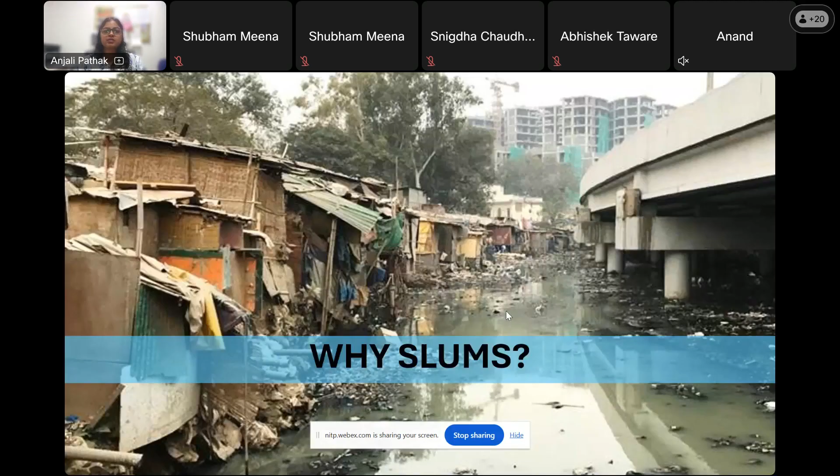But why we are talking mostly about slums is important to know that the Asian slum population is increasing, and it is in absolute numbers. So the current dynamics show that the Asian slum population is 56.9%, which is more than other countries. And nearly 1 in 8 people in the world are living in slum or slum-like conditions.

For India, statistics say that 55.4% of Indians are living in these urban slums, and heat stress is the prominent problem that is faced due to their infrastructure. They use temporary building materials to construct their housing, which organically expands, and this organic expansion is haphazard.

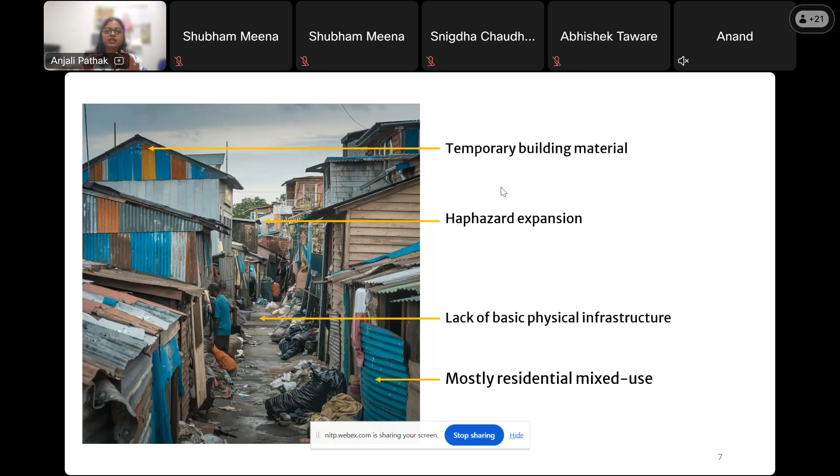There is a lack of basic infrastructure services like road network, garbage collection, water supply, and improved sanitation. These are mostly residing in residential or mixed land use areas because they want to be close to their workplace or livelihood. So they are concentrated on the prime land in the center of the cities usually.

This whole thing comes under physical capital. Physical capital is among the five livelihood capitals. Others are human capital, which includes health, employment, and education; natural capital, the natural resources one has; social capital, which includes the social networking people make with one another; and financial capital, which includes savings and the credit facilities people access.

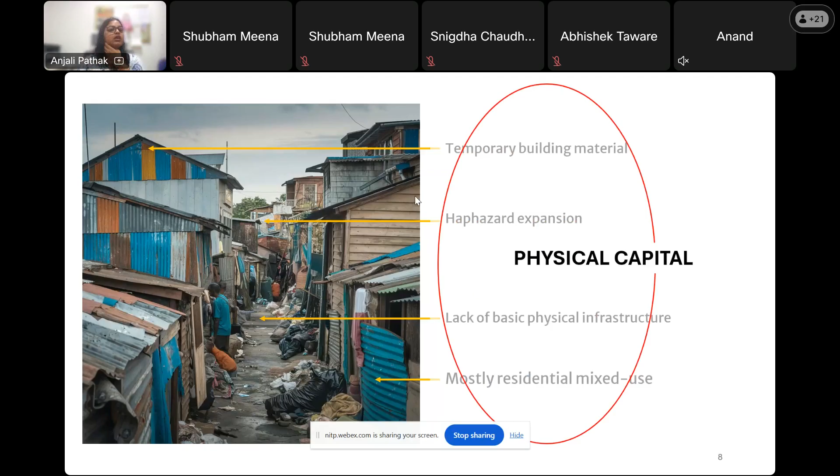So today we are concentrating on the physical capital that talks about the living conditions of slum dwellers and their tenureship. Slums are categorized by poor quality of life. Davis, in his work, even said that slums are urban badlands, because of the crime, low living standards, and everything that defined them as urban badlands.

This includes lack of access to improved water sources, lack of access to improved sanitation facilities. The government had actually defined what are the improved and unimproved sources for water or sanitation, lack of sufficient living areas, and lack of housing durability because of temporary materials.

And the lack of security of tenure. Security of tenure is categorized by the Indian government as notified, unnotified, and recognized—these are the three levels of tenure security with the slums where they are residing. These are the conditions one can see in how and wherever they are living, like slums or squatters.

But within this slum housing, they are indulged in livelihood activities. So they are making use of their resources, with all the available resources, earning and making it beneficial for them.

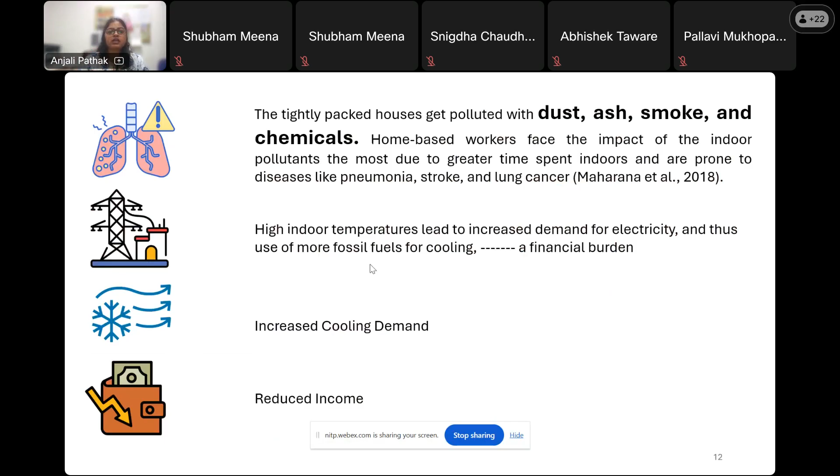So increased cooling demand reduces their income—this is directly proportionate. Slums in the city are 6 degrees warmer than their neighboring housing societies. This is the gap between the temperature of the two housing types, and that shows not just the physical infrastructure disparity between the housing and the slums, but also the indoor temperature at what they are residing and working within the housing.

There is minimal scope of natural lighting, so they depend highly on artificial lighting because there's no cross ventilation, no natural light accessibility. So they depend on artificial lighting, and this increases their electricity bill, putting them into financial burden and hindering residents' ability to reap economic benefit.

Of course, when they are compacted, clustered, and overcrowded, it even minimizes their livelihood activity space requirement. So heat stress is a prominent factor for home workers, especially living in slum settlements, as it reduces the ability to work for the desired duration. The Mahila Housing SEWA Trust, an NGO in Ahmedabad, worked on slums there and tried to figure out how much

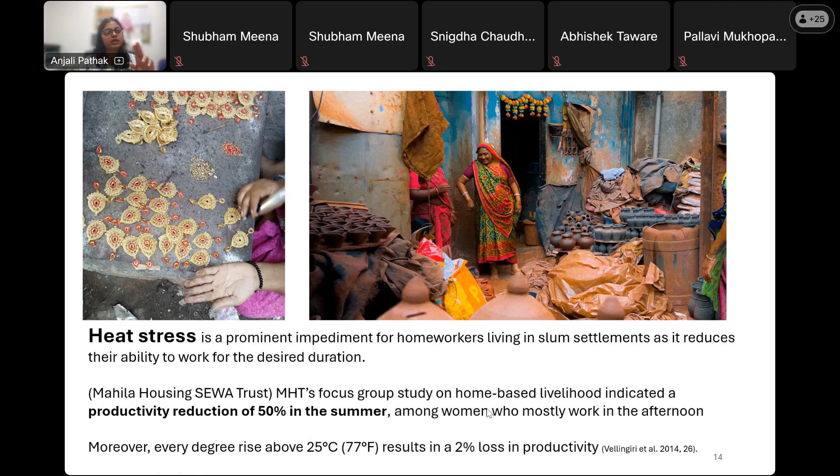Moreover, every degree rise above 25 degrees Celsius results in a 2% loss in productivity of whatever home-based activity they are carrying out.

So there comes a solution of cool roof technology and better ventilation. Better ventilation is always a difficult task to achieve because of the clustered and compact housing. But cool roof solutions help slum dwellers at least become aware of heat stress and strategize to minimize it. Heat-resilient roofing technologies reduce indoor temperatures, resulting in lower energy use and improving the health status of residents living in the slums.

In Kanpur also, while doing my research work, I have seen that financial burden is a major issue. 80% of the slum dwellers say that summers are their worst month, and among all the financial burdens, the electricity bill is quite high for them, since the slums have metered connections.

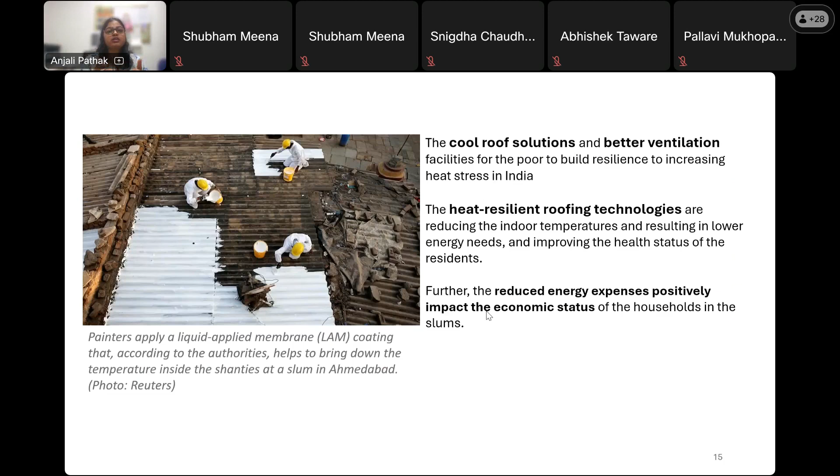When notified slums have a metered connection, the government is not only providing them physical infrastructure availability and accessibility, but at the same time they get a perceived tenure security—that if the government is providing infrastructure, this security is also felt within them. So what this makes them do is start making their housing better.

In this process, we have four interventions related to the roof type. Roof type is actually a major component that can reduce heat stress.

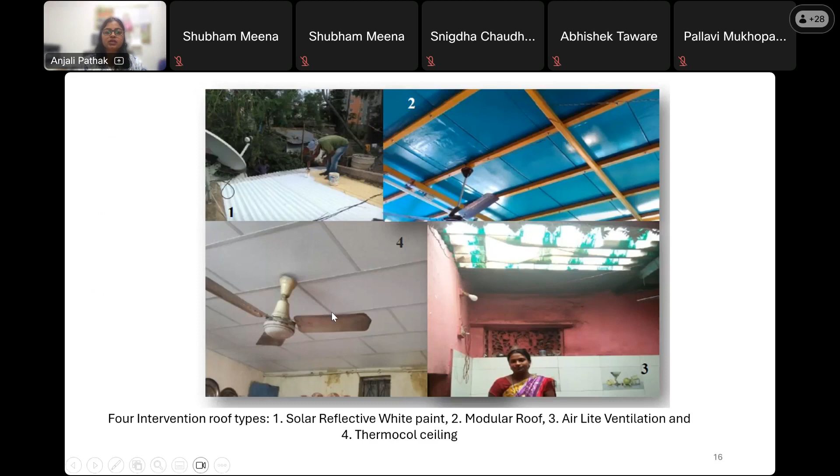So four interventions were there: the solar reflective white paints that we saw in the last image, modular roof, air-lite ventilation, and the fourth one is the thermocol ceiling.

The white paint helps the house stay cool. Solar reflective paints' effect on the external surface color on the thermal behavior of the building shows that light color reflects heat from the surface and helps reduce indoor temperature.

On the other hand, solar reflective paints made with specialized pigments have high solar reflectance and thermal emittance.

Following the literature, the roofs of the households are painted on the top side. Before they were provided with white paint, women in Badi Bhil Basti used to dampen curtains inside to try to cool the surface.

So their alternative strategy, when the paint was not there, was to dampen the curtains and put them inside their house—this is how they coped with heat stress. Many times they are not aware of the heat stress until they see the health impacts.

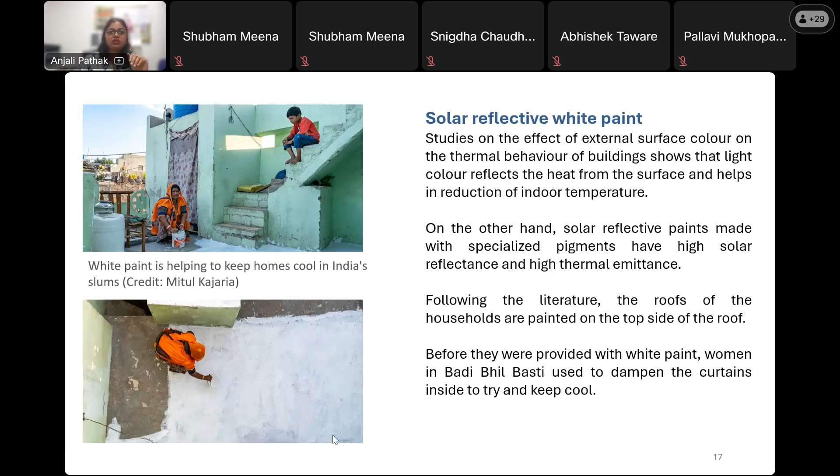Now comes the modular roofing system, the second one. Modular roofing system is a waterproof roofing made up of paper waste and coconut husk, a signature product of Rematerial.

So we are reusing the material and making it a modular roofing system, which is environmentally friendly and a good alternative for the RCC roofing system. It is also easily dismantled.

It can be taken to the next place if they are moving, or they can dismantle it and reinstall it by adding incremental housing or something. So the roof proved to be a boon for slum dwellers with uncertain land tenures.

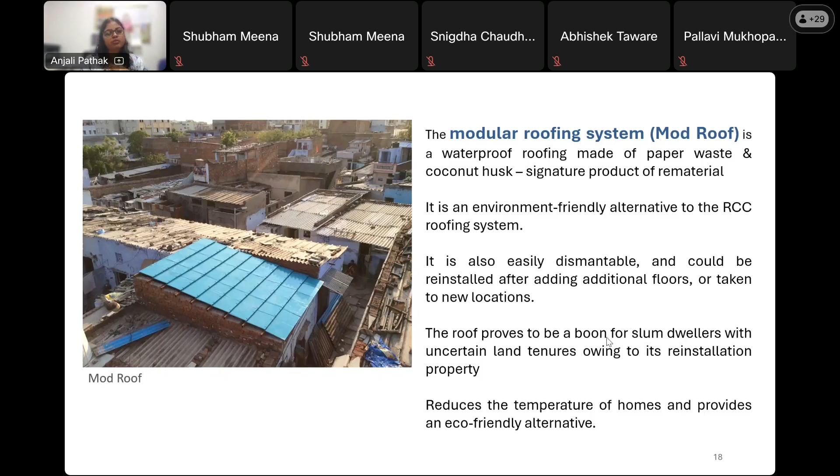When they move from one place to another, maybe their house gets demolished and they are evicted—these roofings can be dismantled and easily taken to the next place. This gives them advantages: reducing the temperature of the house and providing an eco-friendly alternative.

Now comes the third one, the air-lite ventilation. Since slums are compact, clustered, and haphazardly grown, lack of natural light is a problem.

Air-lite ventilation sheets give a passage to daylight and airflow into the house, and are often used in households that do not have windows for fresh ventilation.

The sheet is made up of fiber, in a dome-shaped structure as you can see in the second picture, with a small opening. This ensures circulation of air, while being a transparent sheet so accessibility of natural light is also there.

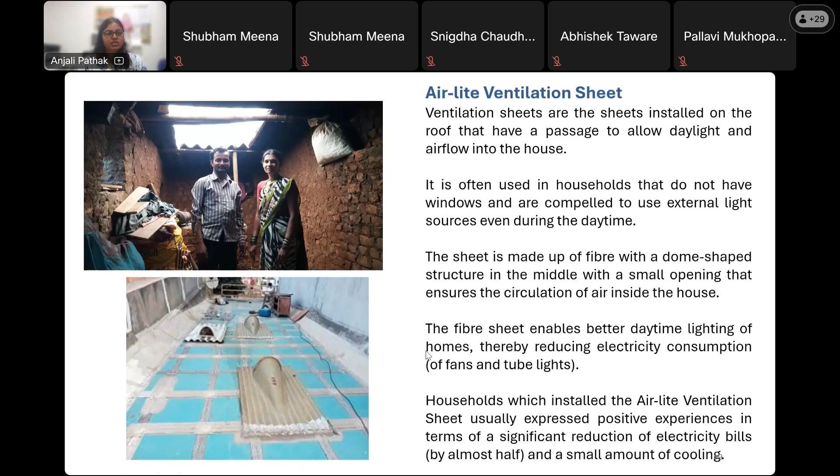Households which install the air-lite ventilation sheet usually express positive experience in terms of using less artificial light or using ceiling fans for cooling.

Now comes the fourth and last one, the thermocol ceiling. The thermocol ceiling comes from a different kind of dropping roof, like the false ceiling that we make.

The only thing is that here they are using thermocol because it is cheap for them and can be removed and repaired easily. So affordability matters to them.

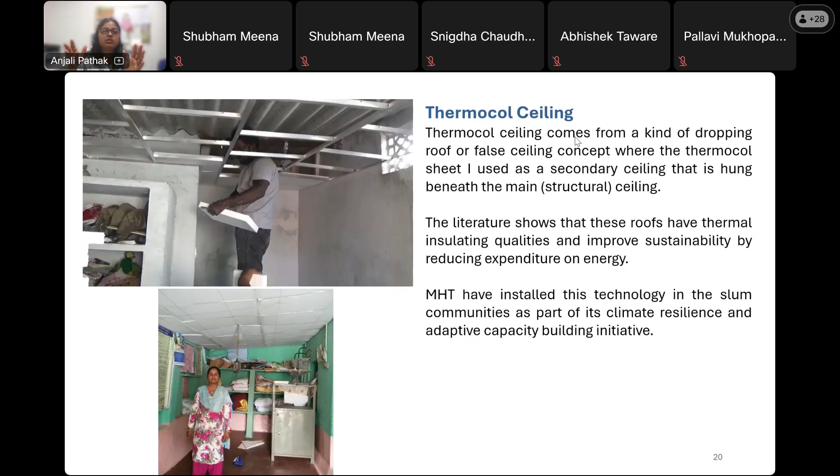Literature shows that these roofs have thermal insulating qualities and improve sustainability by reducing expenditure on energy. So MHT Mahila Housing Trust has installed these four different kinds of roofing systems in different slums to help the slum dwellers understand heat stress and cope with it.

Unlike the conventional roof types that they are having, let's have a brief look at the conventional types other than the technologically advanced versions. So the first one is tin roof, then asbestos sheets, and then RCC concrete roofing.

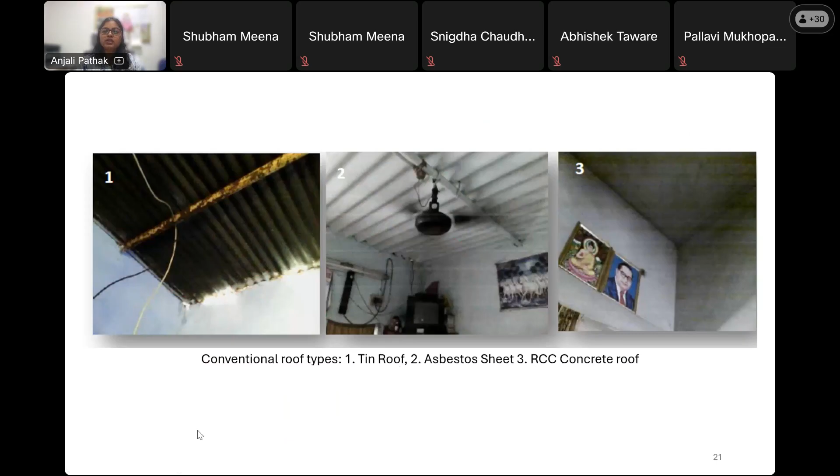RCC concrete roofing is actually giving them tenure security, a better version of the house, but then the heat is a lot more than with the cool roof system.

Tin roof is pocket friendly and has easy accessibility, widely used roofing material among poor income communities. Lighter weight, flexibility, durability, and reusability are the structural characteristics that allow slum dwellers to buy and use it.

The Indian user probably identifies this sheet as a tin sheet or tin roof. It absorbs most heat and makes the indoor hotter than other roofing systems. So although they are affordable, they make the indoor hotter than other roofing systems.

Further, there are chances of rust formation during the monsoons and corrosion, so they have to rebuy it and then replace the tin roof.

Unlike the tin roof, asbestos sheets provide better facilities for the roofing system, but they are a source of airborne toxic fibers. Health researchers have reported that this type of roofing material could cause life-threatening diseases when people live under it throughout their lives and for long durations.

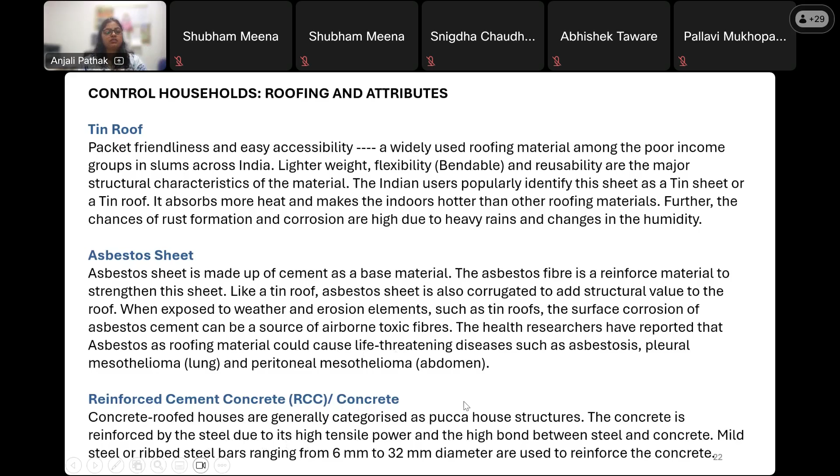They are the preferred source of roofing system, but due to unclear tenureship there is always a threat of eviction, whether notified, non-notified, or recognized. So people try not to make permanent structures and try to eliminate pucca structures in favor of other types of roofing materials.

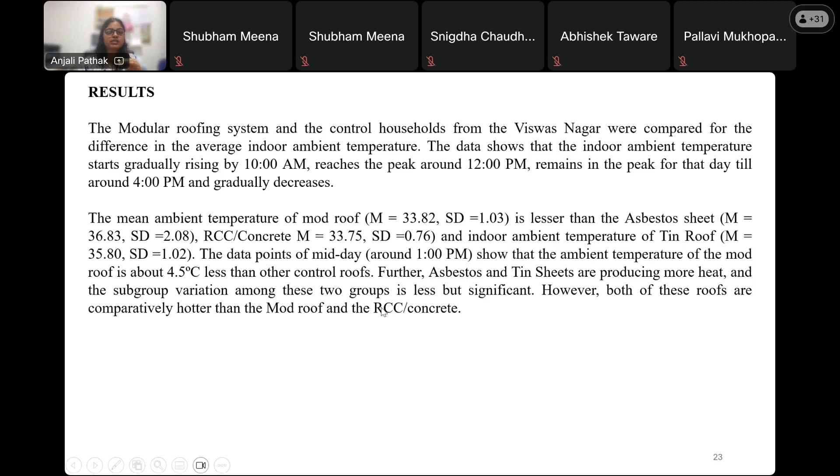Further, the asbestos and tin sheets are producing more heat, and the subgroup variation among these two is less but significant. The Air Lite ventilation, which gives accessibility to natural light and air, heats up more than the non-interventional roof type - that is what we were saying about the controlled or conventional roof type.

It reaches 39.5 degrees during the daytime, which is at least 3 degrees higher than the tin or asbestos sheets, because the accessibility of light there increases the temperature.

So the design of Air Lite allows more light inside the house, but also makes the house warmer than the other non-interventional or modular roof types. Hence Air Lite may not be a very effective solution to reduce indoor heat stress, but it does allow natural light where artificial lighting would be a financial burden to people.

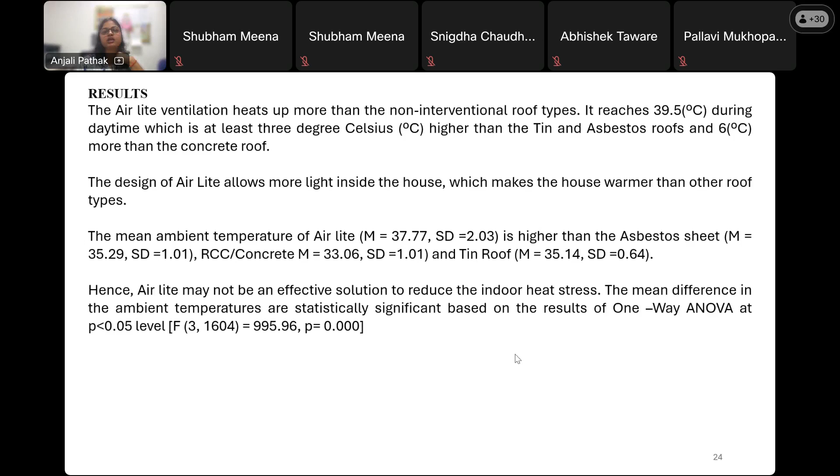Among the four cool roof types, the thermocol insulated roof recorded the lowest surface temperature, whereas the Air Lite ventilation heats up and emits heat.

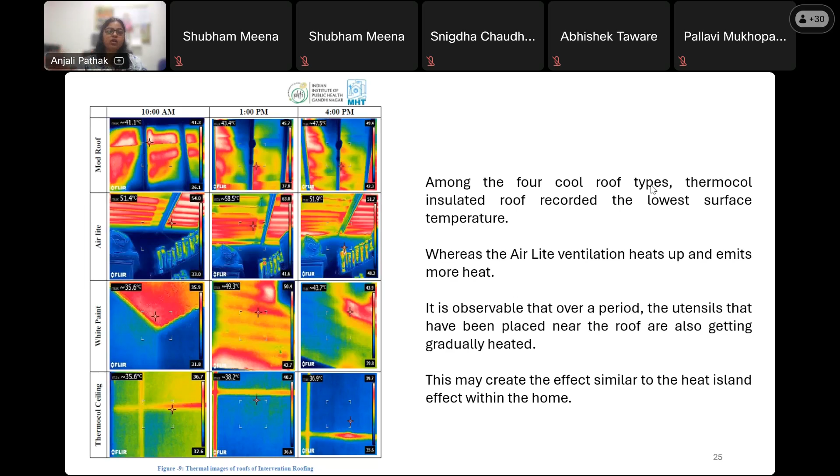In the Air Lite figure, you can see that even the utensils are heated up, making it evident that these are warmer. It is observable that over the period, utensils placed near the roof are also gradually heated, creating an effect similar to the heat island effect within the home, increasing indoor heat stress.

However, the slums may or may not, based on their tenability status, have a valid meter connection to access electricity. In these slums where the Mahila Housing Trust has intervened and tried to change the roofing system, there was a metered connection to access electricity, so they are paying for whatever they consume.

The walls were built with cement and brick. Few houses had tiled flooring other than cement flooring. All families have been cooking inside the house, which also increases the temperature, using efficient LPG or biogas as fuel. These are the improved cooking fuel energy sources.

All families have been using electric fans in their living rooms, and 50% of the houses do not allow for cross ventilation due to the positioning of doors and windows. These doors and windows are usually open to the street or to the neighbor's door.

When asked about the favorable season, winter was unanimously said to be the most comfortable. Monsoon was recorded as the least comfortable season, triggering disruption to home-based activities because of the unhygienic conditions they live in, due to the structure of the household and poor drainage facilities, bringing discomfort during monsoon in the form of inland flooding or waterlogging.

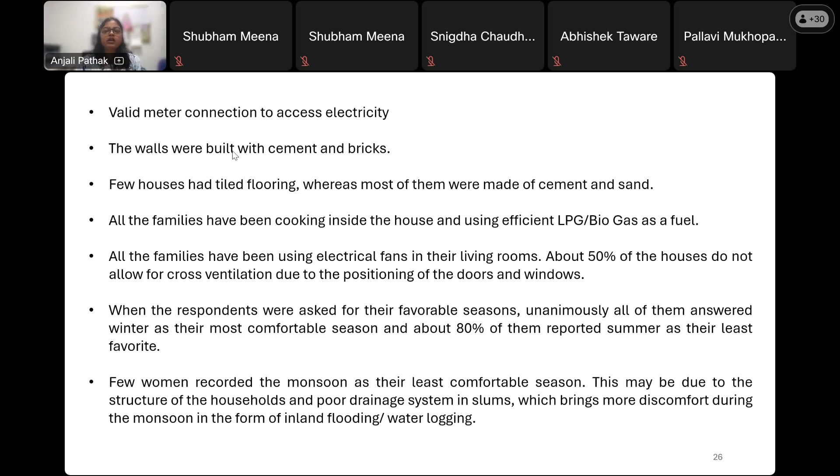These are common things we can see in the neighborhood of slum settlements. Most respondents reported that electrical fans, air conditioning, air coolers, and sleeping outside at nighttime are effective measures to cope with heat exposure.

Throughout the day, they are working in the house engaged in home-based activities, and at night as a coping mechanism they either use electrical appliances or go outside to sleep. Very few shared that wearing loose clothes helped protect them from extreme heat. As per responses collected by MHT, heat-related illness affects 44% of surveyed households during summer.

However, there was no awareness about the Ahmedabad Heat Action Plan within the slum community. Three-quarters of households were not aware that a heat action plan is being formulated, which could provide knowledge used as a coping mechanism or adaptive strategy initiated by the Ahmedabad Municipal Corporation.

60% of respondents had never seen information, education, and communication material about the heat action plan, and the material distributed to create awareness was also not with them, leading to a lack of understanding about heat impacts on health, since they are using coping or adaptive strategies as per their situation, not knowing the heat action plan in advance.

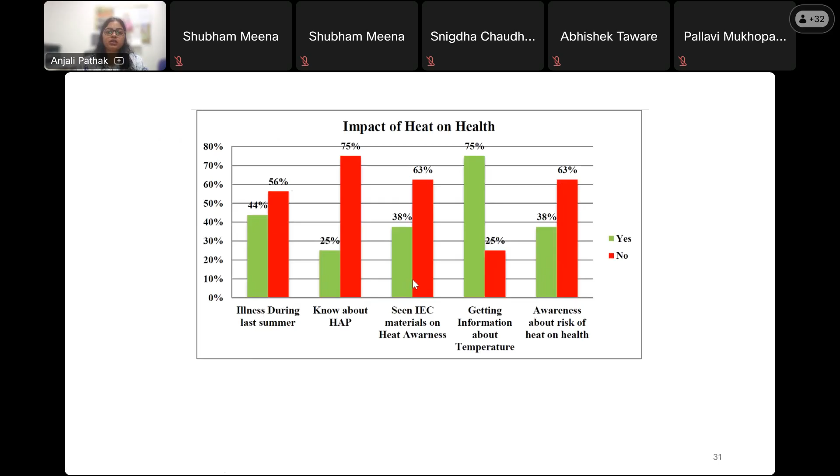Although the modular roof gives much enriched benefits, people will go for mainstream solutions. Low income households aspire to improve their living and working environment to match the familiar standards they perceive as good. Impact on health, illness during the last summers, knowledge of the heat action plan, information, education and materials on heat awareness, information about temperature, and awareness about the risk to health - these are binary data collected on a yes or no scale, to know how many people are aware and how many are not aware of the effect of heat on their health, and which medium helps them most.

Now, unlike western India, where temperature is the primary contributor to heat stress, in West Bengal on the eastern side, the effect of heat is exacerbated by high humidity. So the important factors involved are number of rooms, number of occupants, roofing material, wall material, presence or absence of windows, whether windows are closed or open at night, presence or absence of frequent power failures, and presence or absence of electric fans.

So like other slums, those in West Bengal are also in the same situation of unhygienic, compact, overcrowded conditions. But the key factor is how they are adapting to the excessive humidity.

So the important factor associated with high indoor heat index is electric failure and number of occupants, related to the crowding index. Crowding index is people per room - how many people are living in one room. That is also sometimes synonymously used for overcrowding. This suggests that body heat may contribute to indoor heat stress, and these are the factors that worsen the situation in the slums.

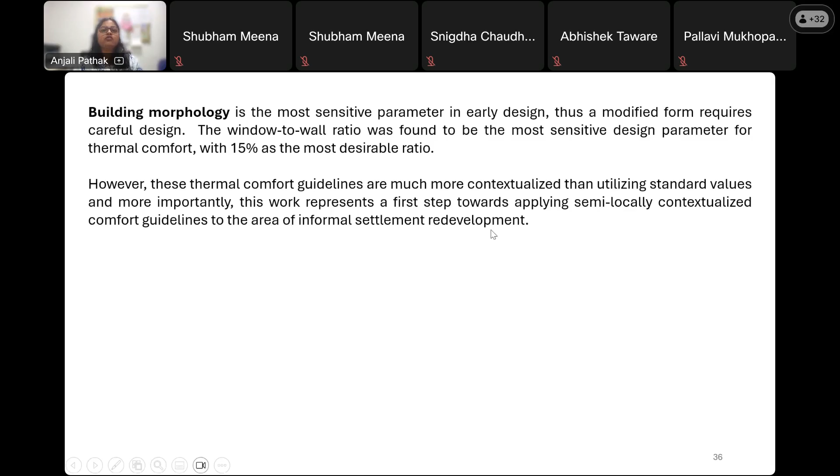Redevelopment will be the foremost task. A significant body of research has utilized physics-based energy simulations as a basis for understanding how early design decisions impact energy uses and comfort at the building and urban scale. These simulations are often based on deterministic inputs and modeling assumptions which, if defined incorrectly, can leave lasting energy and thermal discomfort in the building.

Factors including window to wall ratio, ventilation, and wall insulation are among the most common parameters that affect building energy performance. In slums, all three of these parameters are made up of temporary material. Urban form and specified window to wall ratio had a substantial impact on simulated energy uses, highlighting the potential for such results to provide guidance to designers.

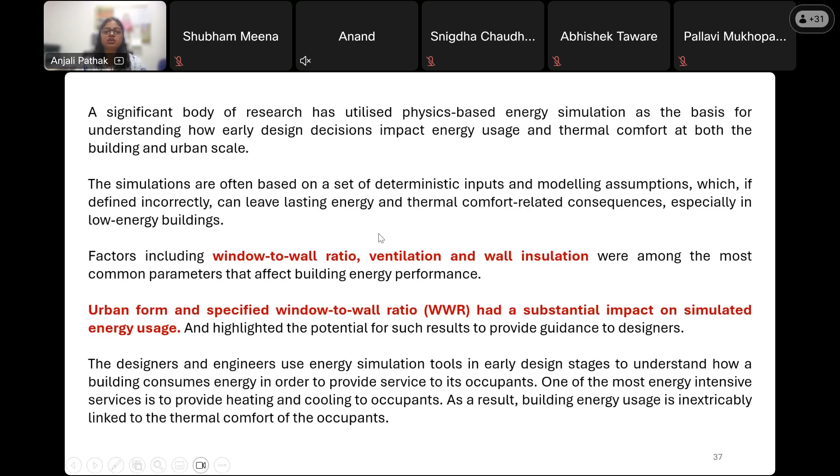Designers and engineers use energy simulation tools in early design stages to understand how the building consumes energy and can provide service to the occupants. Due to the hot and humid climate of Mumbai and differing cultural thermal response norms, low-income households rely more on ceiling fans and natural ventilation than other active cooling methods.

The National Building Code of India specifies indoor temperature ranges for all types of buildings: 21 to 23 degrees Celsius for winter months and 23 to 26 degrees Celsius for summer months. However, a study evaluating small and medium apartments identified that the thermal comfort range for Indians should instead be between 26 to 32.5 degrees Celsius. Thermal adaptation measures by occupant action may be physiological, psychological, or behavioral, and thermal adaptation is region specific—it should be contextualized according to the season and climatic variation in indoor conditions.

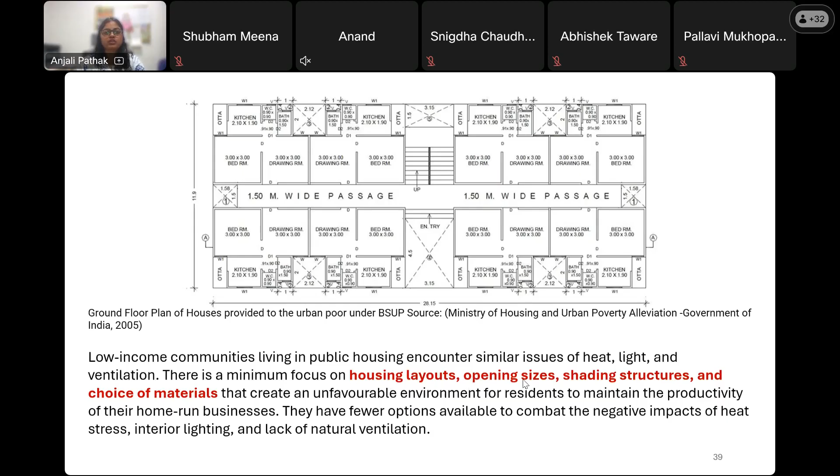Moreover, residents belonging to economically weaker sections often lack access to information on technology and products that can improve their overall thermal comfort. They remain unaware of extreme environmental changes that hamper their livelihood.

For instance, a study of a slum community demonstrated the lack of access to information about heat waves. Subsequently, they had limited opportunity to prepare for extreme heat events and change their behavior in anticipation, which is definitely broadcasted by the government for the public.

Indian affordable housing domain has seen a national level push by the Pradhan Mantri Awas Yojana, and many cities in India are leveraging the national subsidies made available under the program. Units are either used to house resettled families or sold to eligible families at subsidized rates.

We have already discussed that under Pradhan Mantri Awas Yojana, a parcel of the land is used for social housing, and the remaining parcel of the land is sold at market price.

So the subsidies can be managed by the government, and this is a premium to the developer also, to develop social housing or public housing.

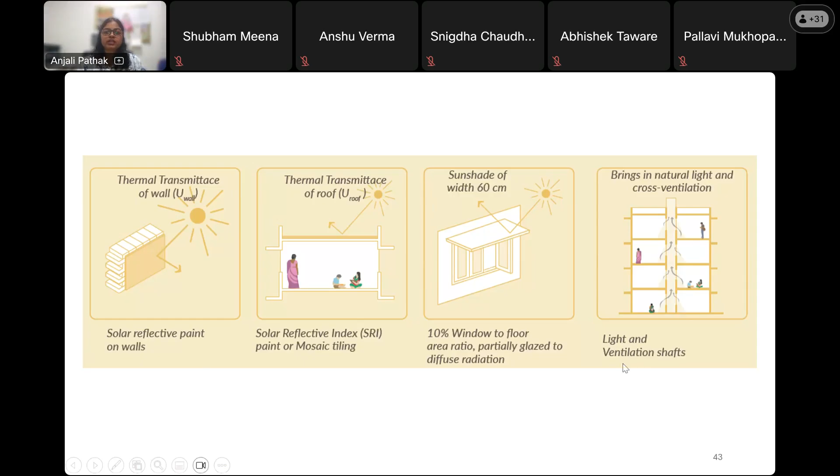So from this presentation, what I have learned, and you will also, is that new research, policy and regulations need to be simplified, in a way that non-technical people can also understand, including government, NGOs, citizen groups, and private developers, so that they can use it in their design process.

Grassroots actors play an active role in extending the learning to the community and enabling implementation on the ground. And what we have seen in the participatory approach is that schematic plans can be discussed with the public or the dwellers there.

Solutions to tackle challenges arising from inadequate levels of light, ventilation and thermal comfort among low income communities should be aspirational, with the emergence of eco-friendly building products being targeted to low income communities with funding support.

However, many products are not readily accepted by people, partly because of their own perception of standard products. Low income households aspire to improve their living and working environment to match the familiar or perceived standard. That a product is sustainable and eco-friendly does not mean much to a low income community unless it offers tangible benefits, justifying the higher cost.

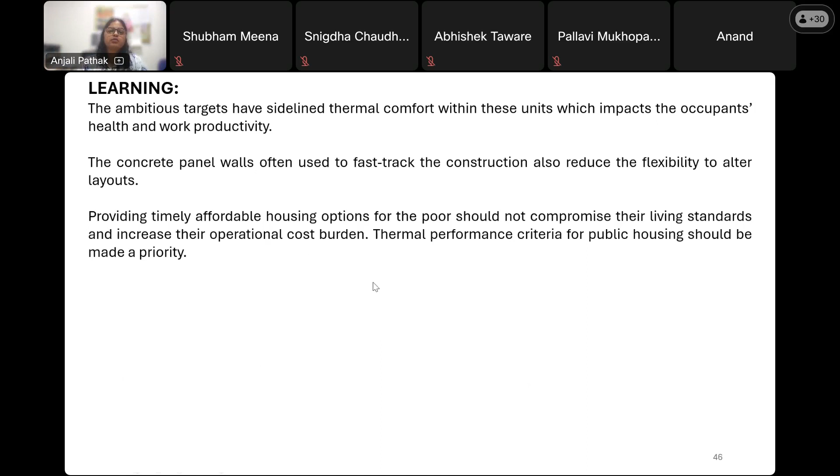And when mass production is there for the housing, it should be done in a manner that minimizes the increased operational cost burden. And thermal performance criteria of the public housing should be made a priority.

So this is all from my side. I'm open to take questions now.